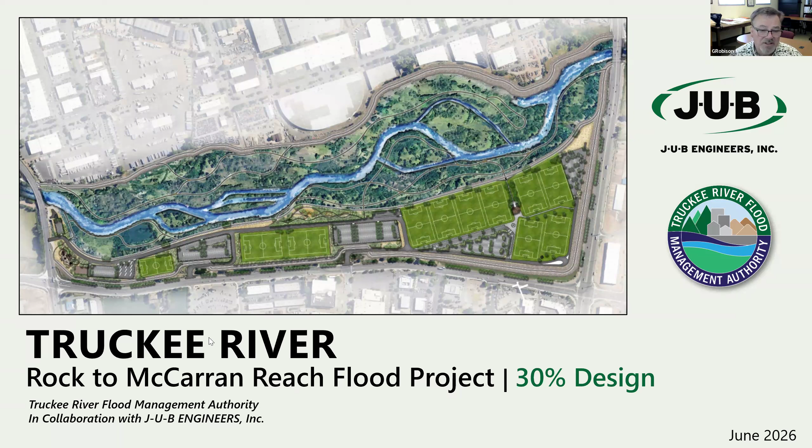So without further ado, Shane, if you could advance the slide for the Rock to McCarran Reach project. The speakers today will be myself. I'll be doing just the first few slides to set up the talk, and then Shane Dyer with JUB Engineers, who is the primary consultant on this project and has done most of the work. They will carry most of the rest of the talk. I may chime in if something comes in that's a little different, like, oh, that's a policy thing or something like that. I may jump in, but most of it will be Shane.

And the purpose is to inform the public of what we're up to, what the progress is. We really want to not leave anything hidden or unknown to people. We're trying to go out of our way to be very public about this and also to get comments from people. We do want comments. Comments have helped us with the design. There are things we've added because of comments in this design and in other designs. So it's very important to get those comments from the public.

And a reminder, the primary objective is flooding. Although this is a really cool park, the primary objective is the flooding. Even the park, the main park component with all the fields and everything, that is a detention basin actually, and it is part of the flood project. Next slide, please.

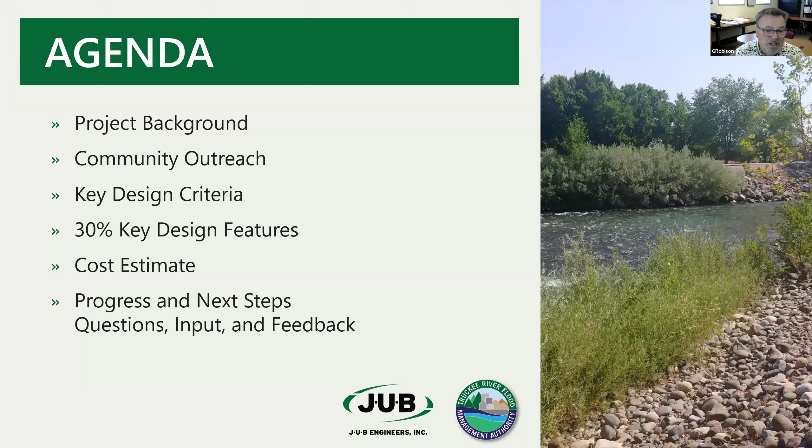So the background of this is this project has been going on for quite some time, since 2024. And in April of 2025, we did a pretty comprehensive alternatives analysis. I think the alternatives analysis is as long as the design report for the 30% design, for instance, a very comprehensive design. There were some design sheets involved.

And then we also did kind of a second alternatives analysis for a park alternative. We had one that was primarily a nature park everywhere, even up in the upper areas where we had the detention basin, or an alternative where we had fields, soccer fields, things like that up in the upper area, play parks, more of a developed park type atmosphere in that area.

The one that was chosen was a hybrid with the upper area having the soccer fields and a more refined park experience. And then there's a large area. The larger area is the river corridor, which is more natural, and it's more about trying to handle those floods in the most optimized way possible and as close to the natural processes of the river as possible.

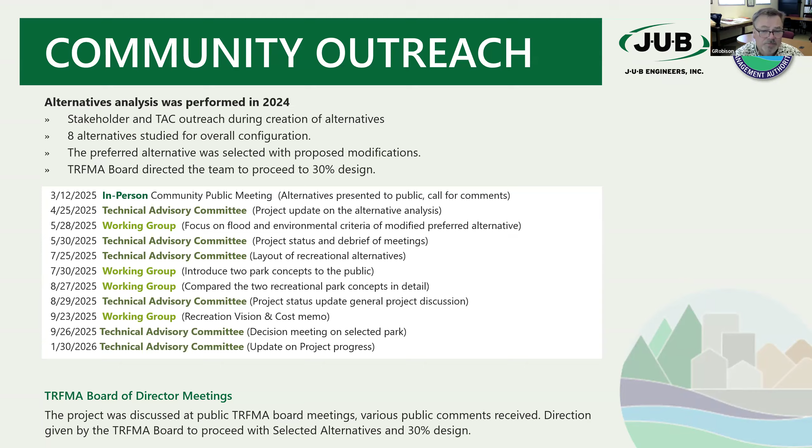So when you add it all up, it's about 15 to 20 meetings that we've had for this in various venues. And also the comments that we've received is well over 300 comments when you add everything together. Next slide, please. So with that, I'm going to give it over to you, Shane, and you can start talking about the design criteria and what is going into the 30% design.

Great. Thank you, George. Appreciate it. I would be remiss if I didn't call out some of my other team members too. So I'm Shane Dyer with JUB, and Wood Rodgers has helped us a lot on the park, and NHC has been critical on the geomorphology, and Crawford Engineering is doing geotechnical on our team. So I would just put that out there as a really big team of design consultants working on this.

So in these key design criteria, our number one criteria is to protect from the 117-year flood event and keep that contained in the river corridor with 3 feet freeboard, meaning you've got the levee, and then when the full flood comes through, there's 3 more feet until it reaches the top. So during that 117 year, there'll be 3 feet additional of protection. That's really representing that 97 flood. That's what we're designing to, the 97 flood.

Another key criteria is we have to evaluate the downstream impacts and limit the 100-year peak flow increase at Vista Narrows to 2,400 CFS so that there's no adverse effects in the downstream. So that's really important.

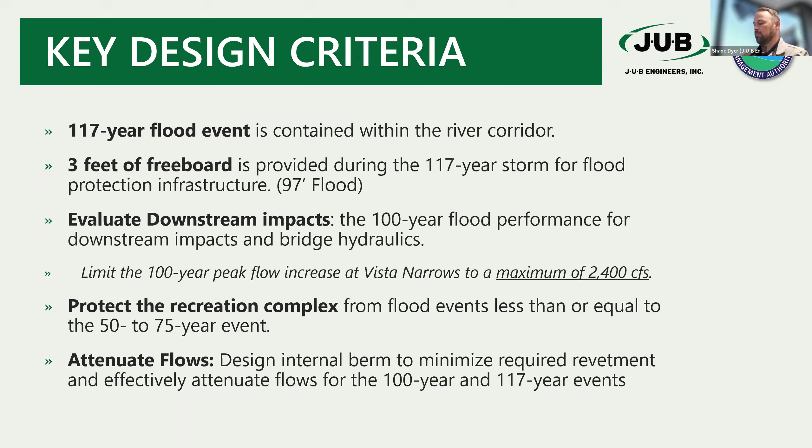All right, so I'm going to break this up into 4 parts: the flood and river corridor improvements, the environmental design, the transportation design, and then the nature park and recreation design. So the park design. So I'll go through those 4 sections.

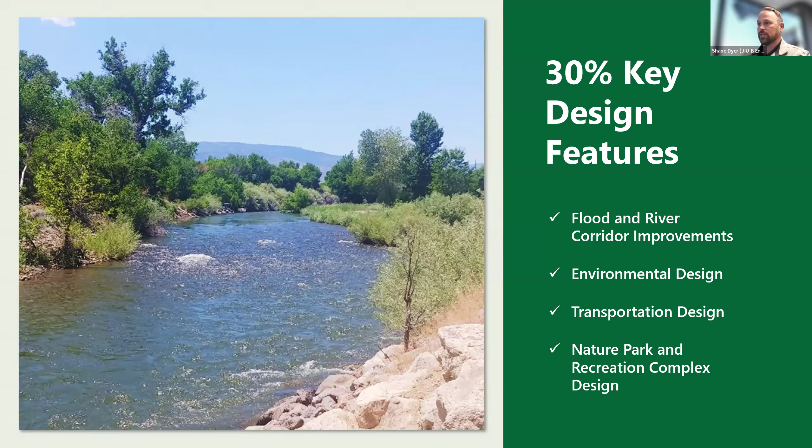For the flood and river corridor, the big parts of this are, of course, the levees, which we have the 3 levees: the north, the north internal and the south levee. And I'm going to show you those. And then we have this internal berm that goes right down the middle, if you can see my cursor, and I'm going to show you this as well. This protects the park.

And then we've got the geomorphology. We had an assessment that helps us to establish the river corridor, the geometry of the river itself. Like, how does this work? How do we optimize it? How do we create habitat? How do we make it natural? And then we put it all together and optimize the whole system.

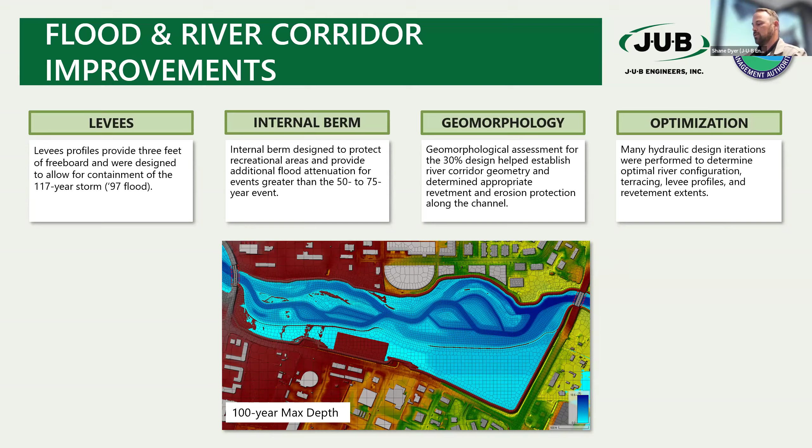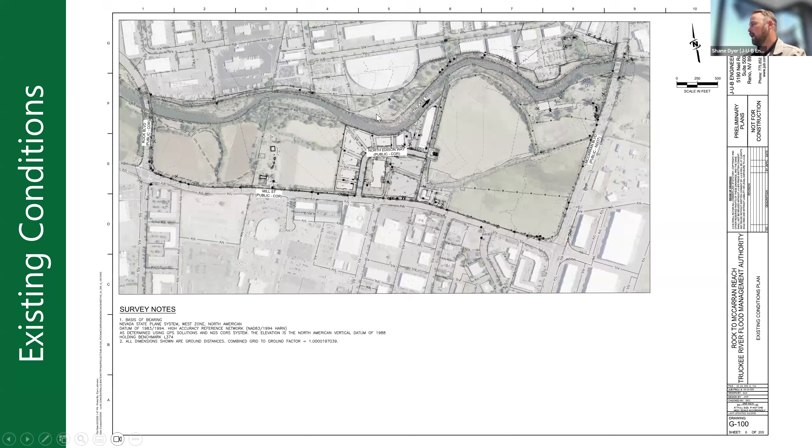And so in the 30% plans, I threw this up so you can see what it looks like. This is the existing. You can see the existing river right here. That's Rock Boulevard. We come down here. There's some commercial confining it on both sides. And then there's McCarran. And this is the whole project site. That's what it looks like in the plans.

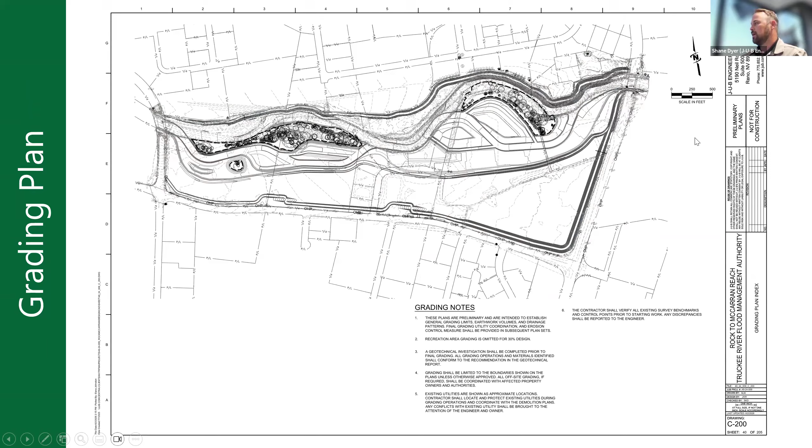Here's the grading plan from the 30% plans. And right here is the main river. If you can follow my cursor, I'm going to show it a little more clearly in future slides. But this is what the 30% plans look like. Now I'm going to blow it up for you. So again, these are grading lines, and right here on my cursor is where the main river goes down. So this is what the grading plan looks like for the proposed river.

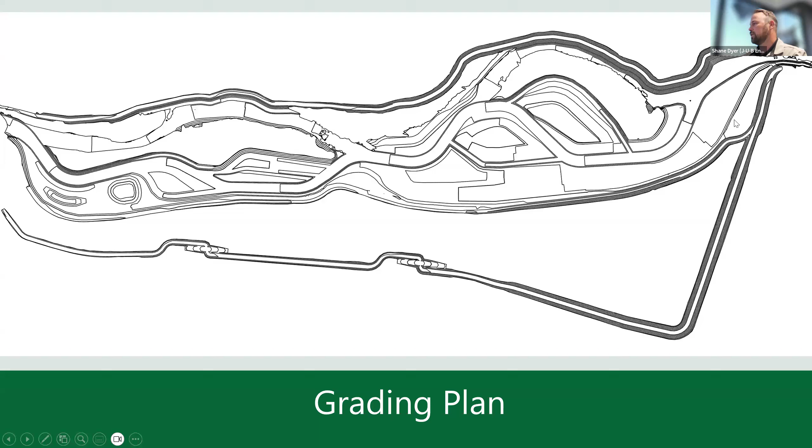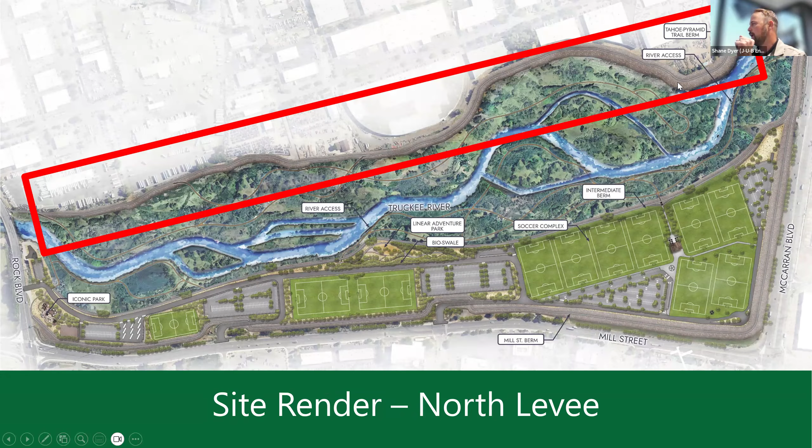And it's hard to visualize that. So we have some other things to help, but let me get back to where the levees are. So this is the north levee right here. You can see it represented graphically. And then we've got the internal berm, and it's this paved path on top of a berm that goes right there. That's the internal berm that protects the park.

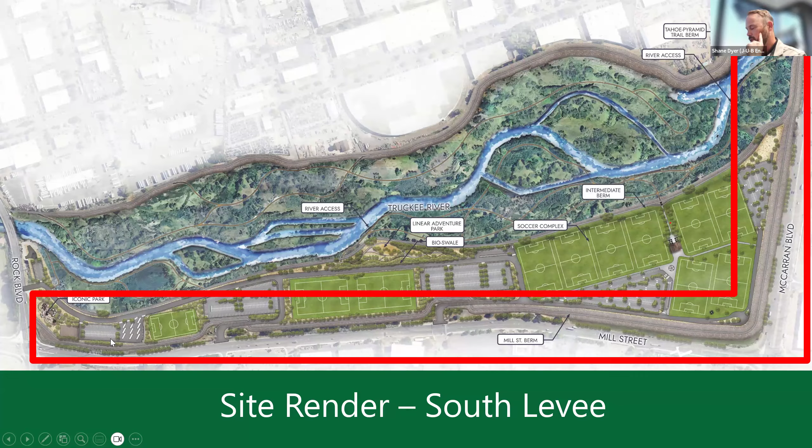And then we have the south levee, and this is what contains the whole flood on the south side against the Mill Street right there. So you can kind of see where those levees are. And then the retention basin, to kind of put a fine point on it here that we keep talking about, is everything south of that internal berm. It's here. It's the shaded area south of the internal berm and north of the levee right here in this shaded area. And this is a critical feature of the flood containment.

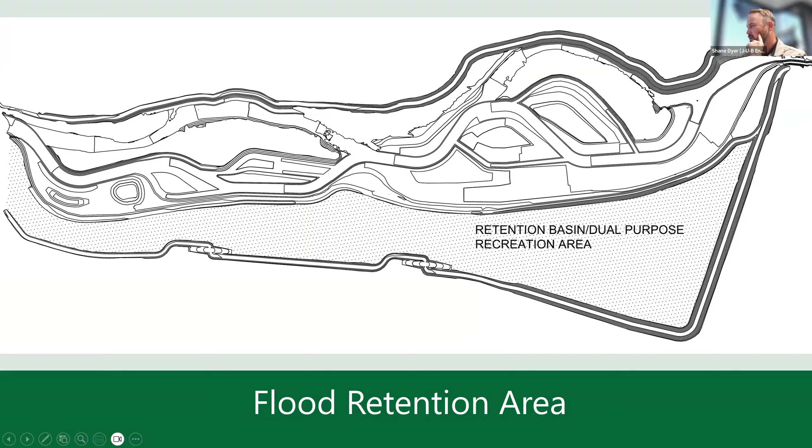All right, so let's go through what this looks like from a flooding perspective, or just from a river flow perspective. This is the average low flow on the Truckee River. It's 350 CFS. So it's designed to look like this at the average low flow. So in low flow conditions, generally, it's going to look like this. And then we're going to go through a bunch of recurrence intervals.

So this is a 2-year event. And when I say 2-year event, that's the percent chance that it'll happen. So for a 2-year event, it has a 50% chance of happening in any given year. When I say 100-year event, it has a 1% chance of happening any given year. It doesn't mean it takes every 100 years. It means it has a 1% chance each year.

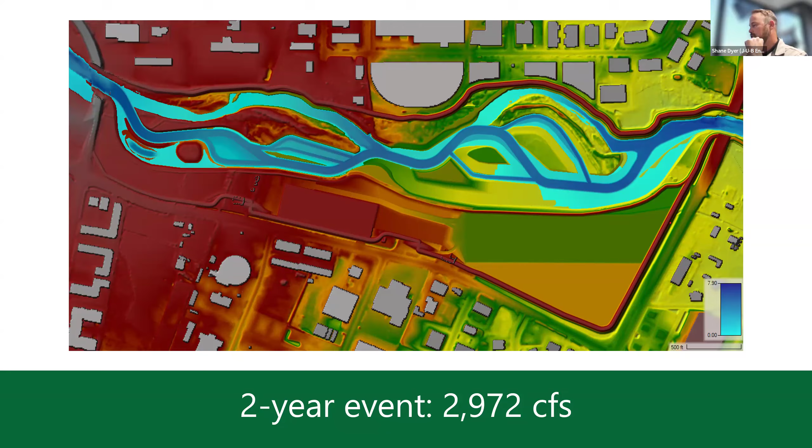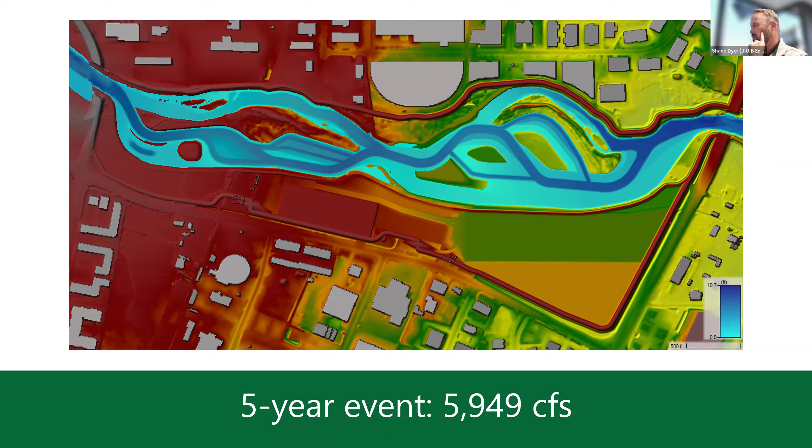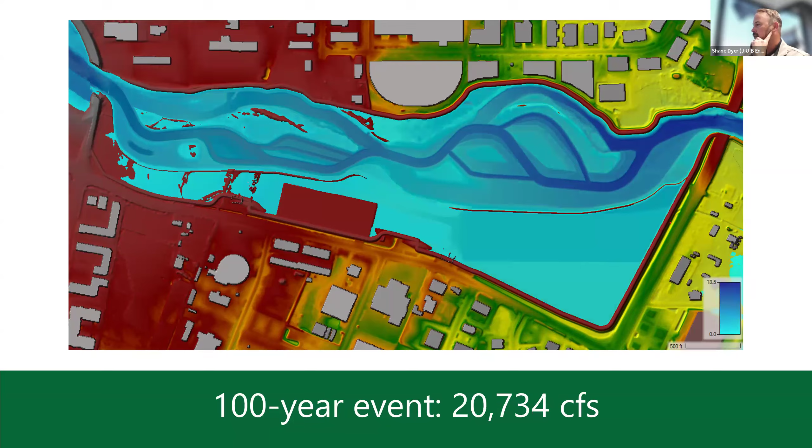And 75-year, and this is really the last event before the recreation area and the detention gets activated and starts to attenuate the peak, or bring down the peak of the flow at the larger storms. That's 17,000 CFS. Then we jump into the 100-year storms. This is the 20,734 CFS. So big storm, fully activated in there. All right. So you may want to study those. You can download the slides. They're really cool pictures and images.

So I wanted to just jump into some of the revetment, and that means some of the protection, like the erosion protection along the river. A lot of times when you see these projects, you'll see erosion protection all the way up and down the river. And what we've done is we've worked really hard to minimize. So everything in black here is where the velocities, we haven't been able to reduce them enough, and so we have to put in some kind of erosion protection. But we've been able to reduce a lot of the potential erosion protection and confine it to limited areas so that we're not doing a whole bunch of rock on the slopes everywhere that doesn't look natural.

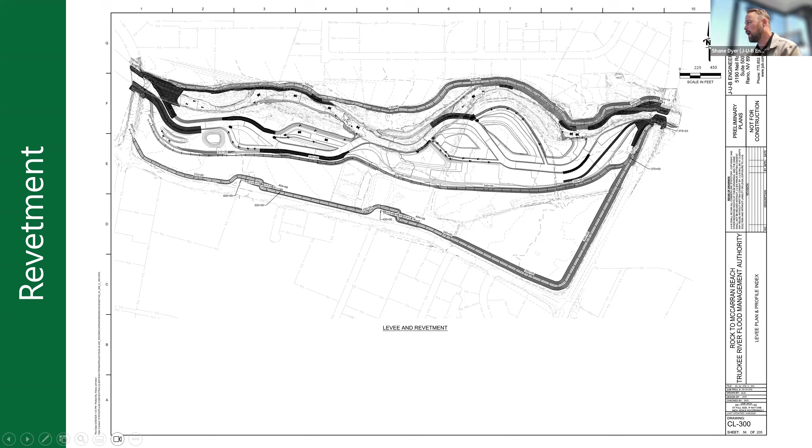And I'll kind of show you. So here's these black areas, keep that in your mind. And when I say what erosion protection looks like, this is what riprap looks like. And we've really tried to reduce the riprap amount and move to other forms. Like over here on the far right is a vegetated riprap, and that's much more desirable from a natural perspective. These bank-attached log jams and using woody debris and using logs is something that we have proposed, and root wads as well, potentially, and then vegetated articulated concrete blocks is a potential, and then vegetated geocell as well.

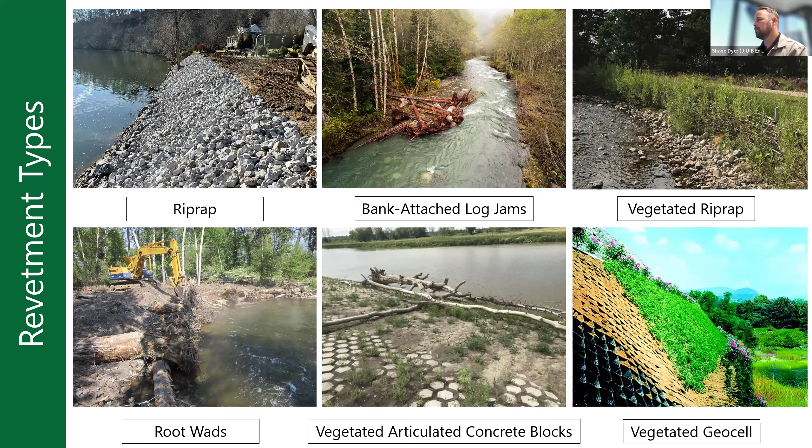So these are some of the things that we're working with, and we're really trying to reduce the overall riprap up in that left-hand corner. We don't want that as much as we want the rest of them that look more natural. And so we've worked hard to reduce the amount that we need in total, and in the places that we are using them, we're trying to use natural solutions and bioengineering. That is out of order.

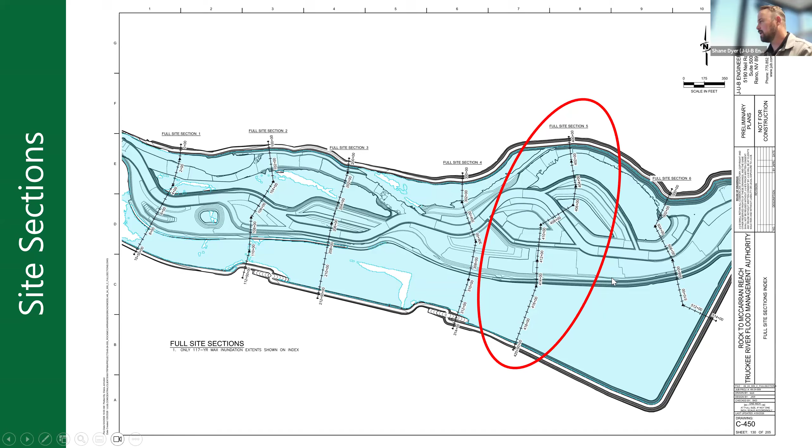Okay, so here's the plans. Just wanted to show you some site sections, some cross sections, and this right here is a cross section through the middle. Right there, you can see it, and in the plans it looks like this. So you're starting on the north side and moving to the south side. We prepared this figure, which we felt was a little more clear, still a little cryptic if you're not used to looking at this kind of plan, but you really start here at 0 and you go over that

north levee and you start going into this channel here, moving on to some wooded areas, down into another channel with terraces. So when we talk about terraces, this is where we're trying to create habitat. We're trying to inundate them at certain storm levels, more often, so that we can grow certain types of vegetation for the riparian zone. So these are terraces, and then these are vegetated areas.

And then we're coming across, this is the main channel here. And then we've got one more side channel, and then we come into this internal berm. You can see these lines are where the flood will be in the river area. So at a 5-year, it's down here inundating all the channels, but it goes up from there, where you get the 25-year, 50-year, 75-year, and then 100-year. And you can see that 100-year max in the recreation area. So this would be that formal recreation area where there's some fields, and where we're doing some of the detention.

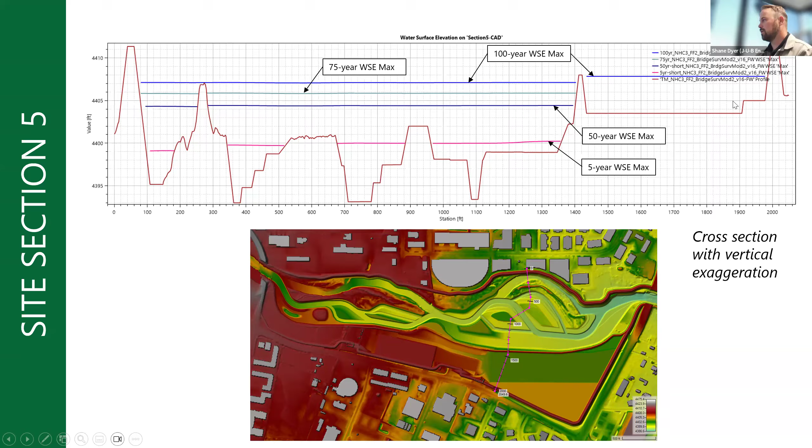All right, so these got out of order. This is a cross section right here. And I have a video, which is really cool. It has a render that I'm just going to play. Some of you may have seen this before, but I'm going to play this so that you can get an idea of what we're looking at. So there's that first channel close to the north levee, and you're coming across. Secondary channel. You can see generally how high those floods will be.

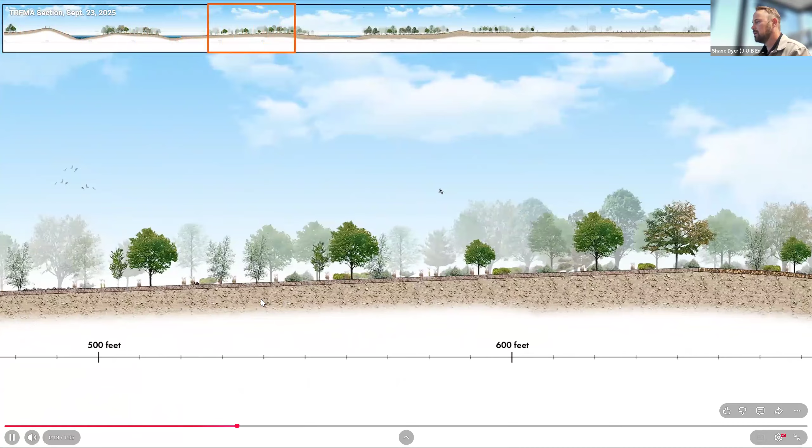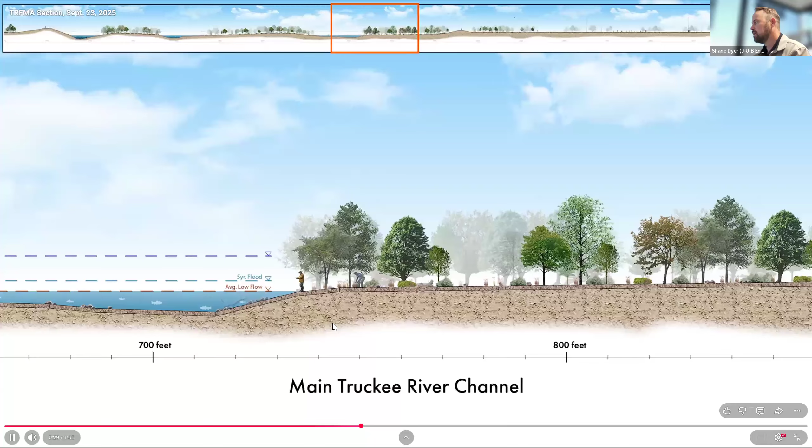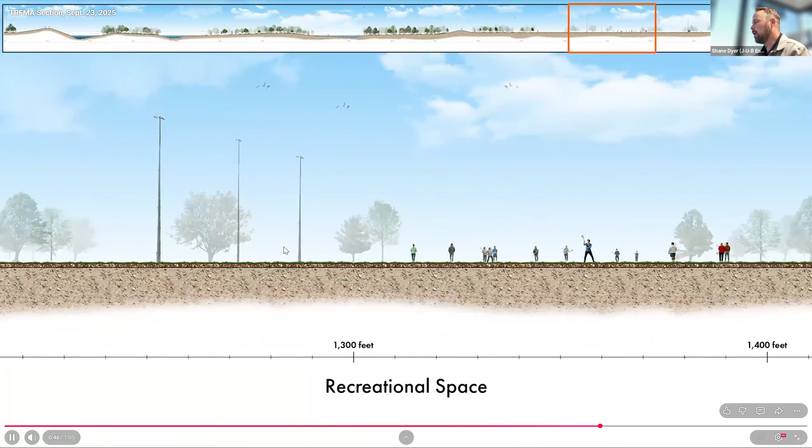Here comes the main river channel as we go across that area. And then this is all just going to be nature trails and nature area in there, and then we hit that internal berm, which will be a paved path. And then we hit into the recreational space itself, where we have more of the formal fields and the parks as we're coming across this. And then we have the south levee here and Mill Street. And this will also be paved right there.

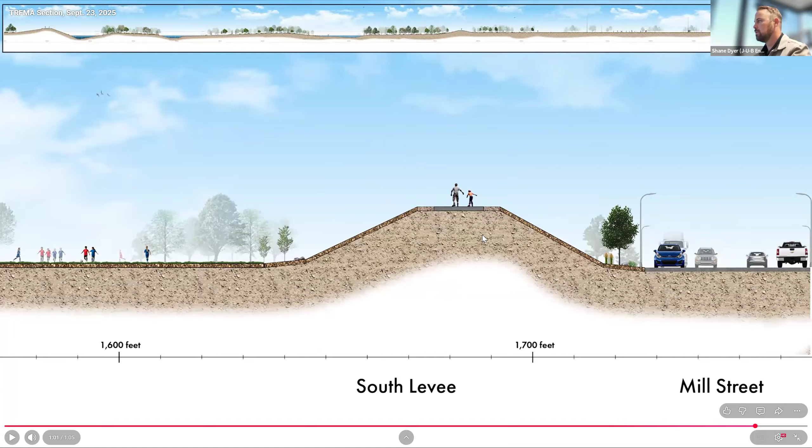So let's see if I can get out of this. All right. So those are the cross sections. Okay, and that's what we really had to showcase the flood corridor. And now I'm going to move into the environmental design.

So for the environmental design, we had an environmental scan done at the beginning. The environmental scan was really, what are the existing conditions, and how should we improve this? They found that the river corridor is very degraded. It has lots of riprap. It's incised, poor condition. And then they made a lot of recommendations on how to fix it with the terracing, increased habitat, backwater channels, and things like that to create the habitat area and the natural area and return it to a more natural state of a river.

One of the things they found in the environmental scan was a Mexican Brazilian free-tailed bat. Many of you may know they live under the McCarran Bridge. So we've had meetings with the Department of Wildlife, NDOW, to discuss the project and how we could mitigate the issue of the bats being underneath the bridge there. And they've been receptive, and we're working through that as part of this 30% design.

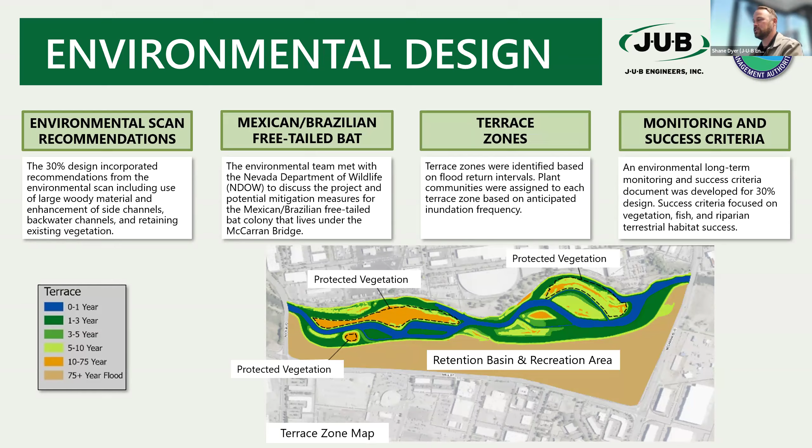And then another big part of this 30% was monitoring and success criteria. So we really looked at, when this is totally done, how are we going to monitor it, and how are we going to say it was successful? And so TRFMA had us put together what success looks like, so that we can design towards that success. Success looks like fully developed plants over this amount of time, and we'll do the surveys in this manner to establish the success. So that was all part of this environmental design element.

One of the things that we did was we had a preservation of the existing tree stands. So there was a big scan of the whole thing. We had all the trees, and they identified these mature tree stands to keep in place, to keep the shading, to leave the habitat. There are a few non-native species among them, but for the most part, we've got a good number of native species. So we're protecting these zones, and we also had to do our geomorphology design around these protected zones to make sure that we had mature trees still in the park and in the nature area.

All right, so the meander belt itself, this is an important calculation that the geomorphologists worked on, coming up with how wide should the belt be? How wide? What would make it a living river? And it comes up with a meander belt of 600 to 800 feet to allow for that living river.

And for the entire length of the project, we meet or exceed the meander belt requirements, except for right against the bridges. And that's a unique thing to be able to do in an urban setting. Usually, you've got buildings and everything, and essentially, they've been able to procure the farms and all the commercial areas, and to actually make a meander belt that can allow for a truly natural design.

Alternative revetment types, that's been important. So erosion protection types like riprap, reducing the riprap, using vegetated riprap, geocells, woody debris, and stream restoration, really bioengineering techniques to try and really make it natural. So we're really working with the bioengineering on the environmental design.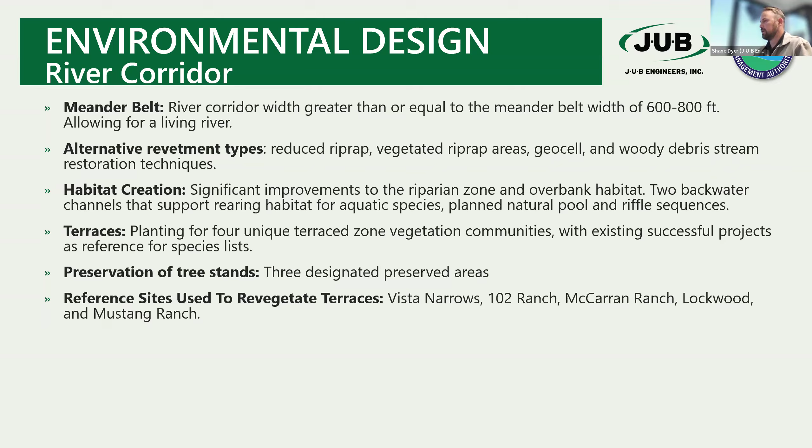So this is just a representation again of the terracing and what it looks like. And we had 4 distinct zones where there's a different species list that we're going to be planting in each distinct zone: the stream channel, the wetland bench, the riparian bench, and then that upland area. So really working through how do we deal with each inundation level, how often they get wetted, what species live there, what's the habitat, what animals like for the habitat.

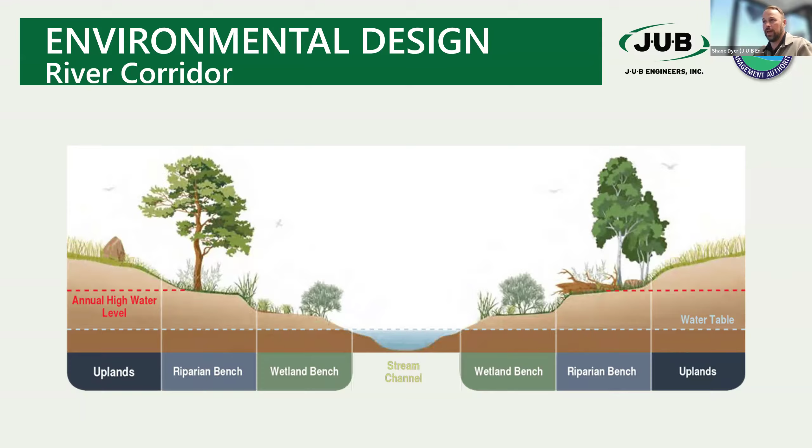A couple more things on the environmental design. We've implemented bioswales into the design, so that reduces runoff. Bioswales are just an area, like you can see down here in this picture on the right. Instead of running the water off into the river or a stream, we run it into the island, and then it sits in the island and infiltrates.

There's another one proposed right along here as an example by this linear park. This is all this bioswale that will collect water and infiltrate. And that's a much more environmentally friendly way to treat the water through the soils rather than running right into the river. The other thing about the river itself is it's protected within the internal berm.

So with that internal berm, there is going to be 0 direct runoff from irrigation and small storms in the park area directly into the river, because the internal berm doesn't allow it. It will all infiltrate, or run to the end and go through a little treatment before it gets released. But we're trying to get it all into bioswales and things like that. So for the runoff concerns, this will reduce the risk of pollution making it to the river with the protection of that internal berm.

A couple other items here, the dark sky lighting. So we're doing the dark sky where it only points down. Treated effluent, we're going to use rather than drinking water. We're proposing to use the treated effluent so that it's a secondary or gray water for the irrigation. And then we're doing a lot of strategic landscaping in the design to do a low impact development design.

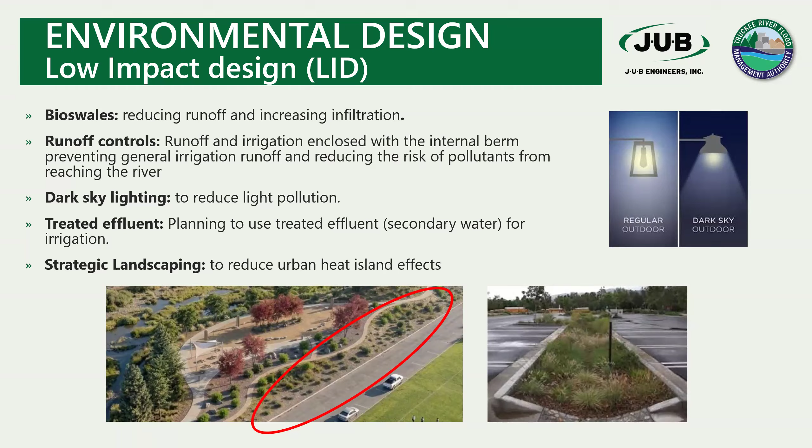Okay, we're on to transportation.

I'm talking a lot here. You're probably tired of listening to me. I'm sorry. We don't have too far to go.

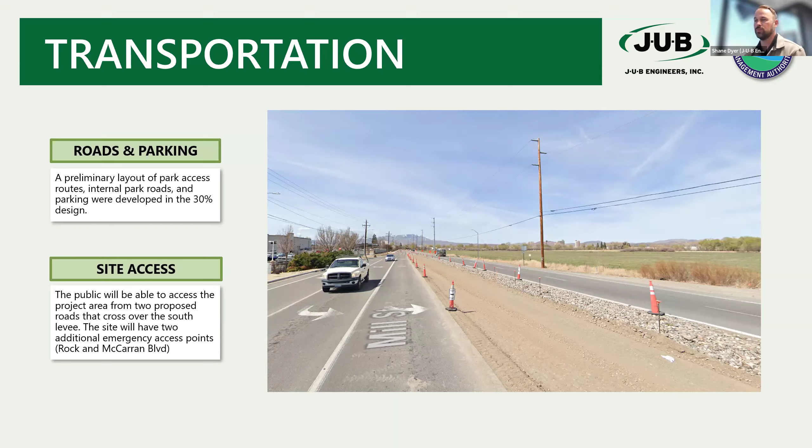All right, transportation, roads and parking. So as part of the 30% design, we have a preliminary layout for the park access, the routes, the internal park roads, and the parking lots. And then we also have the site access where the public will be able to access the sites. The 2 public access sites are off of Mill Street, and then there's 4 total access sites. So 2 emergency access sites, those will be on Rock and McCarran, where the main accesses will be on Mill. And I'll show you those here.

So this is the transportation layout that you can see. And you'll see the main roads are in gray, and the main access locations off Mill are here in these 2 green circles. And you go in and then up and over the South Levee, then you have access in here. You can see the parking layout for the stalls. We have the parking numbers there identified. And then we also have, these are the emergency access locations on the east and west. So on Rock and McCarran.

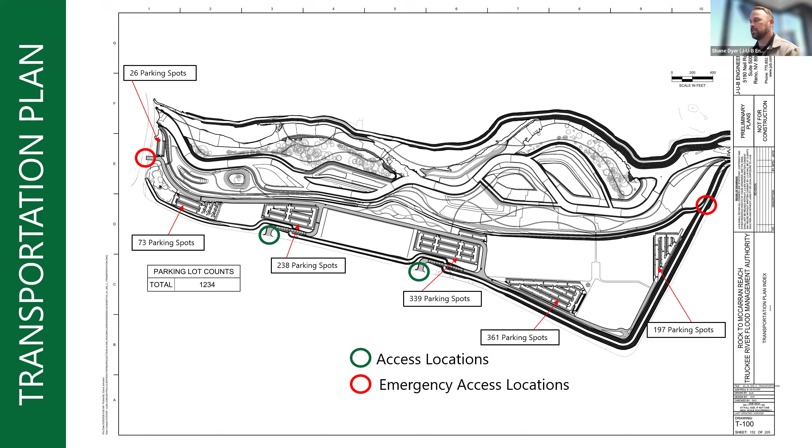And we'll be working with the city of Reno. Now that we have these designs in place, we'll meet with the city of Reno and try to understand their requirements and make sure that all the requirements are met as we move forward on that.

Okay, so that's transportation. And now we jump into the nature park and recreation complex. And I feel like this is what a lot of people really want to see. It's very interesting. It's exciting. And I personally love the flooding part and design, but this is pretty cool stuff. I'm really excited about it.

So we did a lot of public outreach to figure out what was going on. And in the end, as George had mentioned earlier, it was the combination of doing a nature park and a recreation complex. That was recommended by the technical advisory committee, and then selected and approved by the board of directors also to move forward with the combined approach. And the theming of the park itself is a cohesive celebration of the Truckee River, its natural processes, history, and community value.

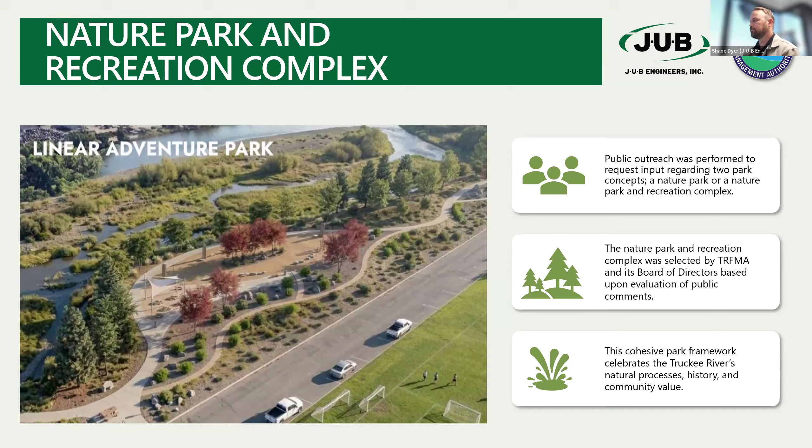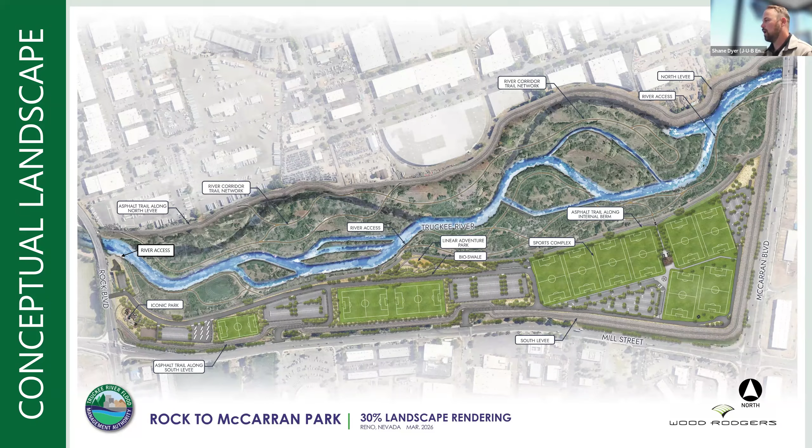So here's the layout, and I think you've been seeing it as we've been going, but just kind of leave that up there for a second. We've got 3 river access points at the top, middle, and bottom. We've got trails all throughout, parks, and then we've got the actual soccer complex, or the flat field complex. And we'll walk through some of these here. We'll kind of highlight what some of them are.

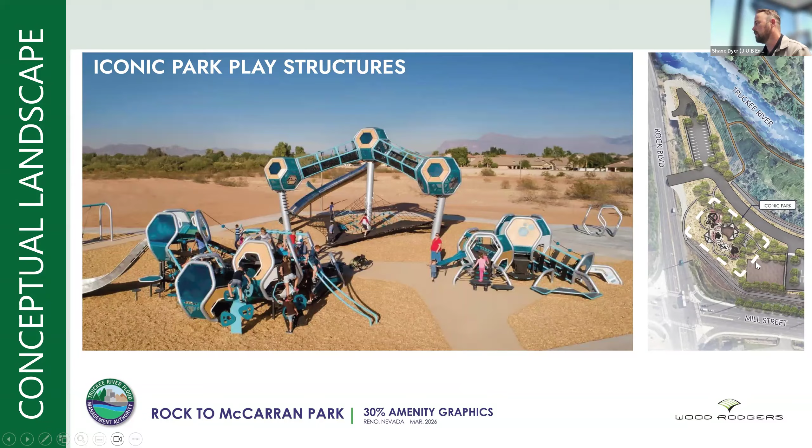So first we have the iconic play park structure. So this is kind of a location map here. You can see on the right where this is in the park on the corner of Rock and Mill. This is a render, or a picture of what it could potentially look like up on that edge. We've got the linear adventure park. You can see there the reference where it's at, kind of against that internal berm. Looks like this.

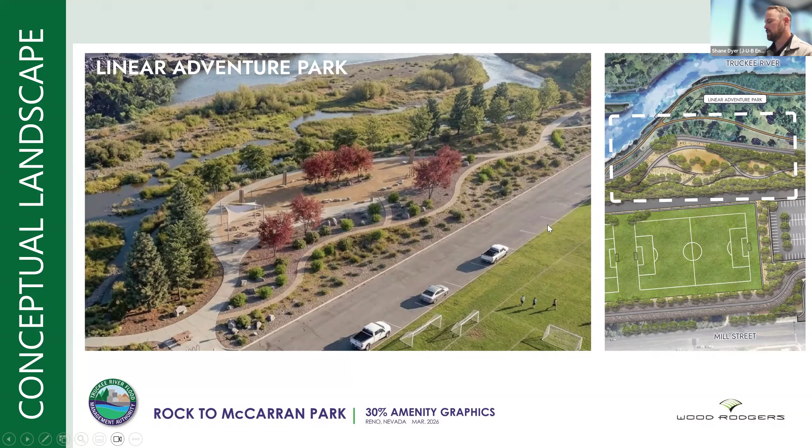We've got some slides on the potential South Levee aesthetics here, and what it might look like when you're driving down Mill Street.

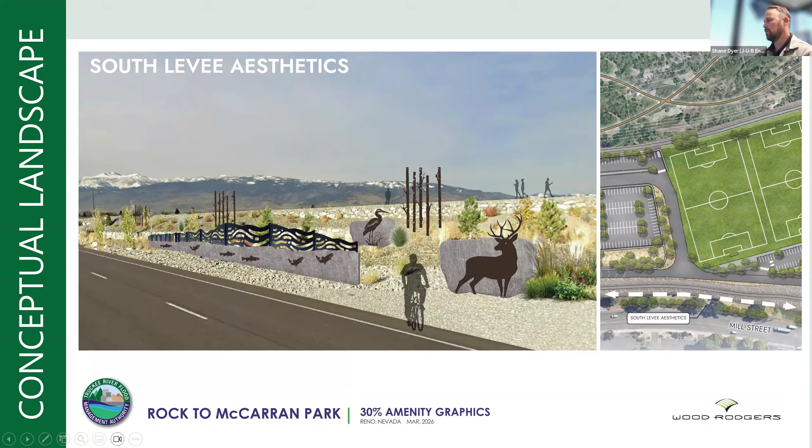And then this is a rendition of all the trails layouts here. So you can see a pretty significant trail system. The large orange dashed lines are the asphalt, the paved trail system. And then the smaller yellow orange lines are the nature paths, like hiking type trails.

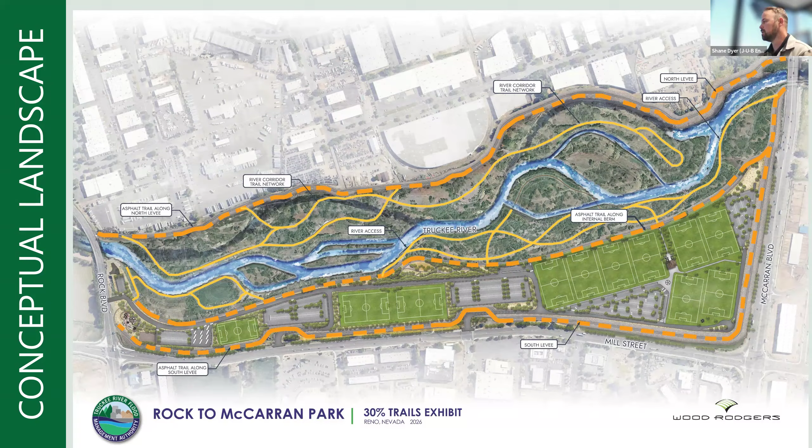All right, so in this, we broke out some phasing due to the costs. And so I'm just going to talk a little bit about the base phasing and the supplemental phasing. And you can see here that everything in green is part of the recreational base, so what's currently in the budget. And then the supplemental phasing is a little bit beyond what the budget has for this park.

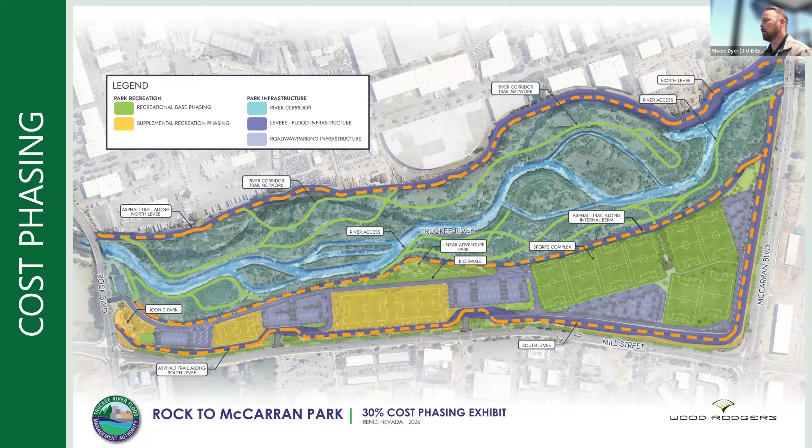So I'm going to kind of go through it. Here is the base. That's without the supplemental. So you'll see the yellows are gone. It really includes the main trail systems and most of the fields, 8 fields. It is missing 3 fields there, one smaller one and 2 full-size fields.

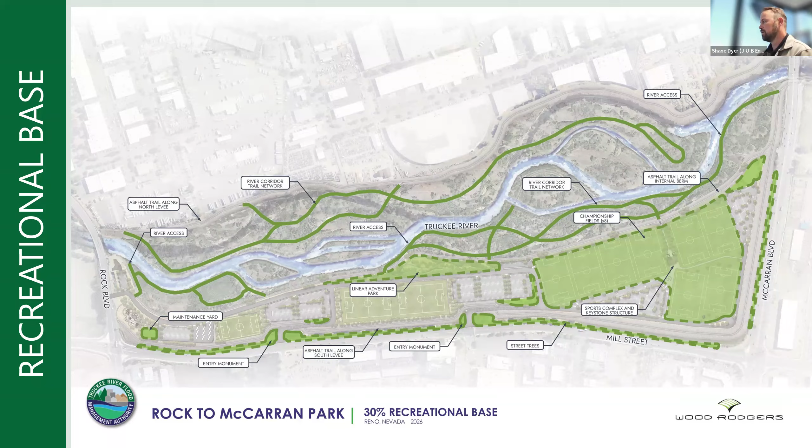So here's just a representation of what the base includes. We just threw this up there. It's going to have the field still. It's still going to have the floodable bathrooms and the linear park and some of the play structures, the river access and the river corridor trail, and some of the entry monumentation.

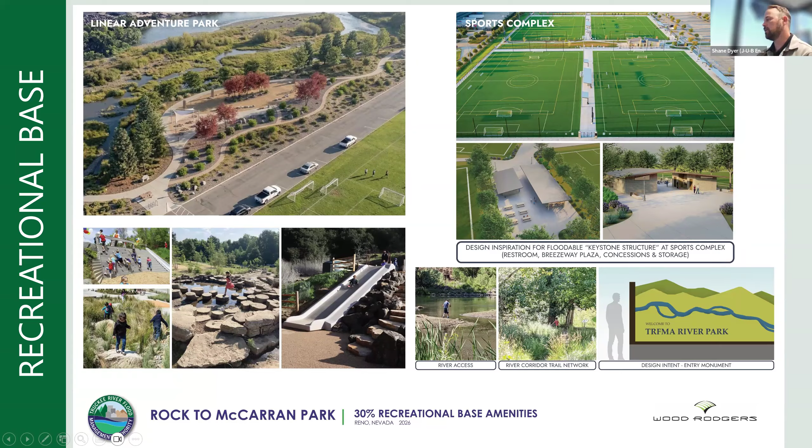So let me show you as we go through on the supplemental, you see what it cuts out here. So these are the areas that are not included from a cost perspective. It pulls out one of the 2 play type parks, this iconic park, some of the expensive monumentation along the frontage of Rock-McCarran, 3 of the fields, some of the levee aesthetics are out on this one. All of the field lighting, so there would be no field lighting on this.

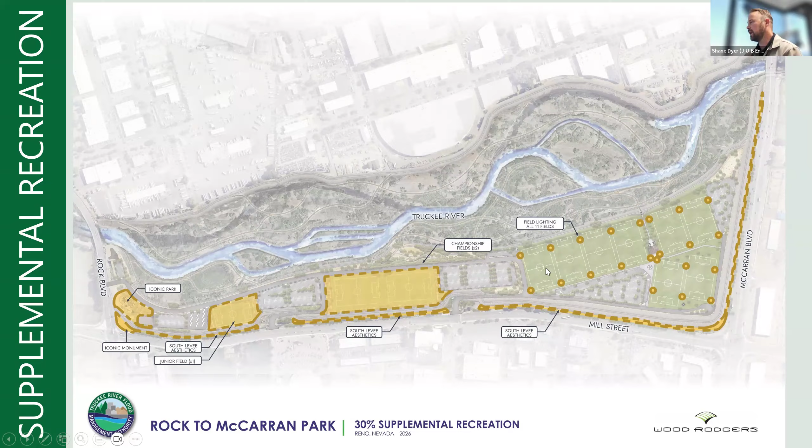And let me show you pictures of what that looks like. So these are the things that would be removed. So that park, the field lighting, these are the preliminary designs right now for the iconic monument that would go on the corners, and the wayfinding and signage, that expensive wayfinding, and then some of this design and aesthetic things on the levee would be phased as well.

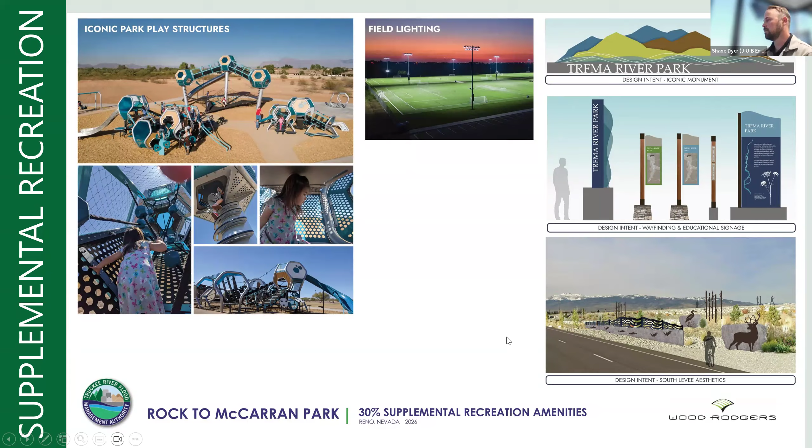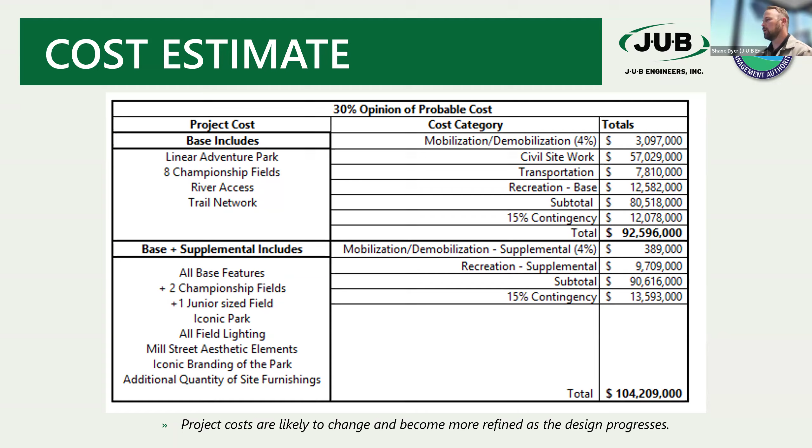All right, so that brings us to the cost estimate, and you can see here the base cost is 92 million, and then when you add that supplemental, the two that we just split out there, we get to 104 million on those costs. Going to jump through here. We may come back to that, but I'll just jump through. We're almost to the end here.

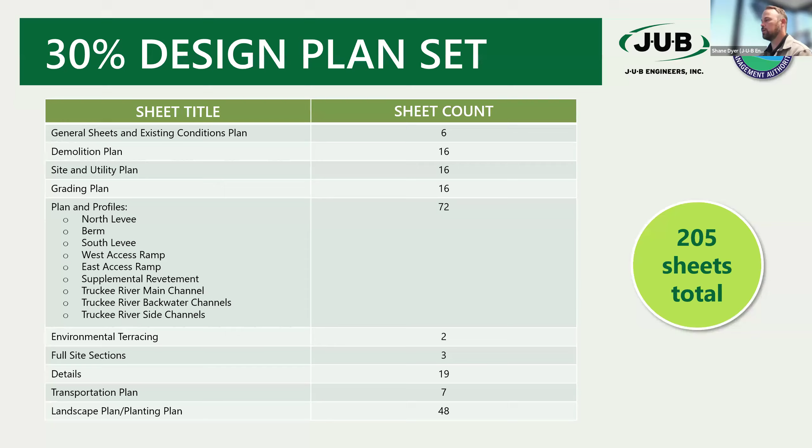It's gone fairly quickly. So the 30% design plan set, in total, we ended up with 205 sheets that really outline what this 30% design looks like for the community. And where we're at in the process is step 3. Step 2 was the 30% design, and now part of the process is to show everyone the 30% design and get the feedback so that we can implement it into our 60% design and make sure the community's feedback gets in there. And then beyond that, it goes into permitting, final design and then construction.

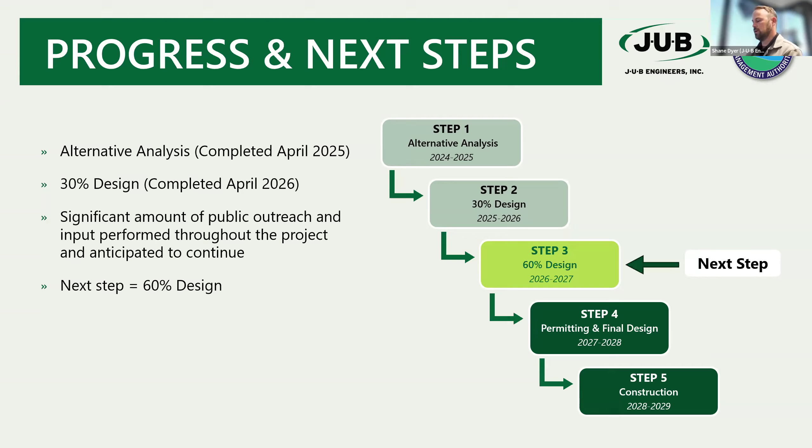So that is it. What'd I miss, George? How'd I do? You did great.

And just some of those sign names like TRFMA River Park, those are not what we're doing for sign names. We're not at that stage yet, but they had to put something on the sign, so that's what's on there right now. There's a lot of different name ideas floating around, so I don't want to presume that was the name of the park. I doubt seriously it'll be TRFMA River Park. So just to be clear on that.

Also, on the phasing, this is more of a policy budget type issue, and on that is the estimate. The last estimate I think you guys did was about 77 million. I had inflated it up to about 87 million. And honestly, I don't think we can really build the whole flood project if this thing is over 90 to 95 million. So that is why there is phasing going on with this park. Build the flood project when we have money, come back to it.

Or if people go, I want lighting, they can do a crowdsourcing or something like that and get the lighting from some other source. So we're trying to get a good basic park that has a lot of nice features in it, but the extra stuff like the extra play park, the lighting, the other 3 fields, all that, would be something that we'd have to do later, or it would have to come from a different source, is the way we're looking at it, just from a budgeting policy standpoint.